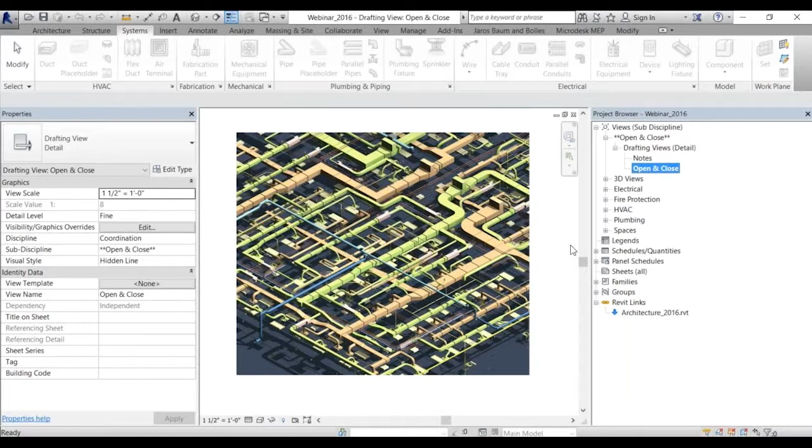In summary, to help our client in their BIM transition, we reviewed their workflows and created and implemented company-wide BIM standards. We also delivered a new BIM Revit template, and helped them in content development, which included smart schedules, one of my favorite things in Revit. Most importantly, we trained their staff to make sure this project is executed systematically to reach our end goal, which is to deliver a walkthrough to the building owners.

Now, before I cover results, I want to go to Revit for a bit and talk more about how we set up projects and what's important when we're talking about a Revit template. If you're a new company trying to set up a project, you probably don't have a lot of content already developed, and you probably don't have a template either. But content is very important when it comes to BIM.

It allows you to be consistent and also allows you to make the next project even better, and the next one, and the next one, which means that you'll win more work and you'll be more and more competitive.

So right here for our webinar today, I have a project open. This is actually the starting view. As you can see, this is our project browser, in a view called open and close. So this is our starting view.

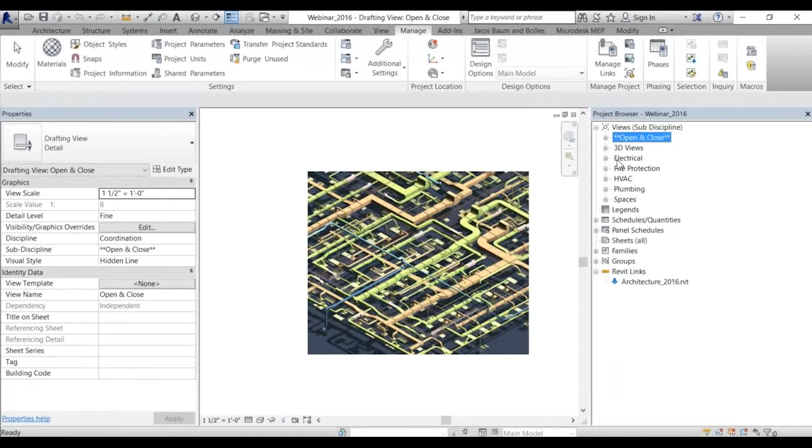Simply because we're here, let me give you a perspective. A starting view can really include anything that you want. You probably have your own format, your company's firm name, the architect's name, the structural team involved, the MEP team involved, maybe even the Revit version or the subdiscipline.

So this can really be anything - I can't say much about this project because it's one we developed for a client - but in order for you to add more information or change this view, if you don't want it to be open and closed, you can always go to the Manage tab and under Starting View, change it.

Okay, so when we set up a project or set up a new Revit template, we first think about organization and visibility. Everything has to be organized in a specific manner, for us to be consistent as a team, for you and I to be working on the same project and know exactly where to go.

So in this particular case, your project browser would host all your elements, your views, your schedules, your sheets, your content, your links, everything is here. To reorganize it, like in my case right here, you can see that I have several disciplines. In this particular project, my approach was, since this project is small, why not include all those disciplines in one file? So you can see we have HVAC, plumbing, fire protection, electrical, all in one file.

This particular organization can be seen by going to the project browser organization, and we can tell that it was organized by subdiscipline. Now, some of you might ask, why do I have 3D views and open and close and spaces here? It's just a way of organizing this.

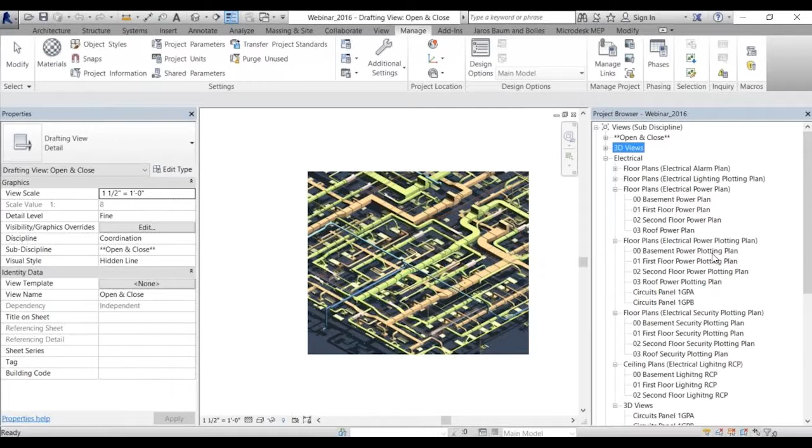It's not the best way, but you can see spaces were created in those particular views. These are the 3D views that were exported, or the isometric views that we had for different disciplines and levels. So this is just a way of organizing it. It doesn't have to be the best way, but that's what we currently have in here.

When we also talk about organization, we should think about the views themselves, so where you're modeling.

If you have a small project, you might be working in a certain view and putting a completely different view on the sheet. For example, right here, this basement power plotting plan is the one that will end up on the sheet, whereas the basement power plan without plotting in it is the one that you'll be working in.

So here we can see that we have a specific naming convention, and that's another thing that we look at when we're setting up projects or creating Revit templates. In this case, we have the level ID and then some description of the view itself, and then if it's plotting, plan, or RCP.

Now, to look at this a little deeper, imagine if you had 50 floors and you want to set up visibility settings for all those 50 floors. You're not going to do them one by one. So that's where we talk about view templates.

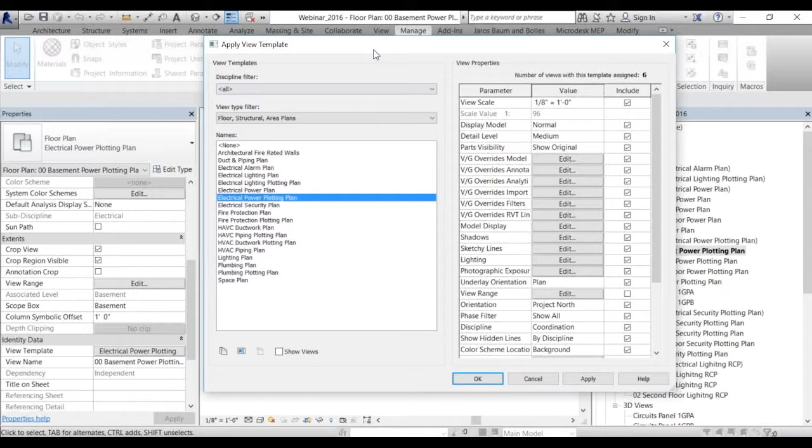In this particular view, since it's a plotting view, you have 3 people working on this project in electrical, and 2 of them are on vacation, and the third one barely knows how to use Revit. He should be able to open Revit and print this sheet. That's why for the plotting views, it's good to have a locked view template that doesn't allow users to modify.

You can, of course, unlock it, but that has specific settings that should be typically displayed on a sheet for power. So if we go to the Properties palette, you can tell here under View Template, there's an electrical power plotting plan view template that was applied for this particular view. And here you can tell that everything was checked except for view range.

And this is really a user preference and a BIM department preference. Like, you can do this in several ways. Some people have view range as a separate view template to apply it to a bunch of views. Some of them included within the view template itself. So this is, we can talk about this for a whole day.

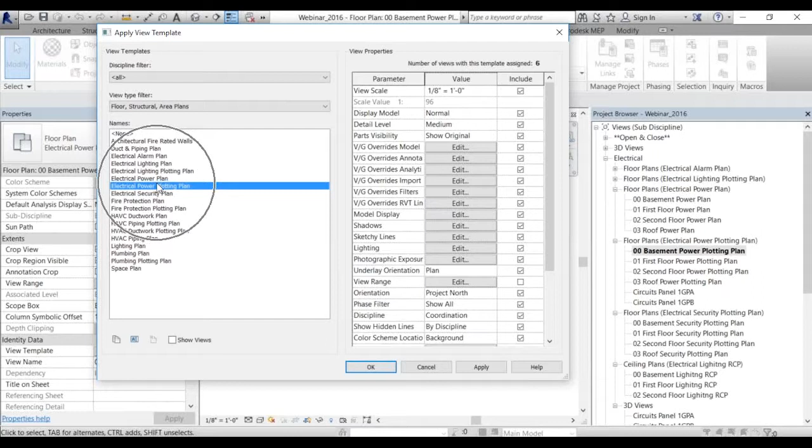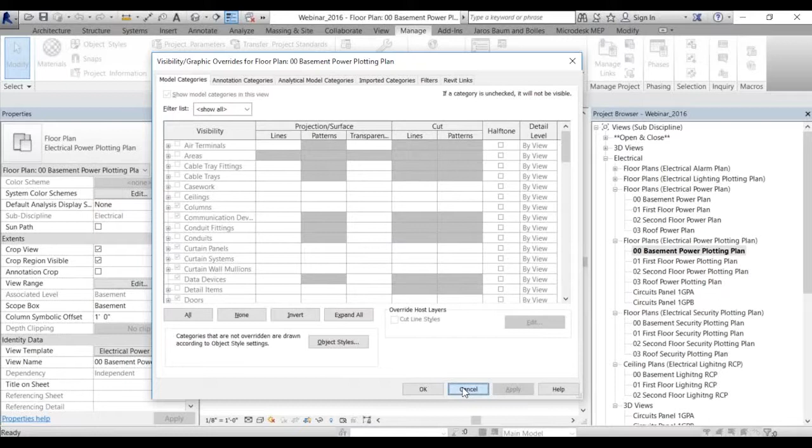But the importance of creating view templates is now we have 6 views in this particular project that have this view template applied to them. That means that if we were to try to change the visibility settings of this particular view, everything is grayed out. The things that should be on are on, the things that shouldn't are definitely off.

Why is this good? Because now, if I need to print this, I don't want to have to worry about, oh, did I turn something off by accident? Did I turn something on by accident? No. Whereas in your working view, that same basement here, you can go, turn things off and on, do whatever you want, do your design here, and then finish by detailing and adding tags in your plotting plan.

So we talked more about organization. We talked a little bit about visibility settings. What other elements are important for your Revit template setup or project setup?

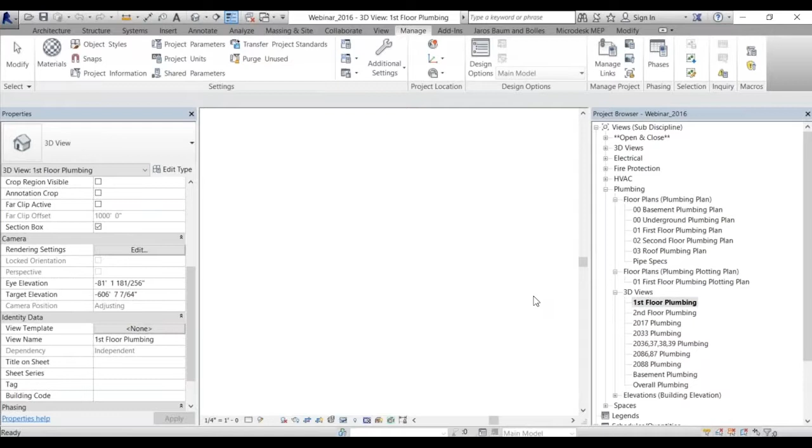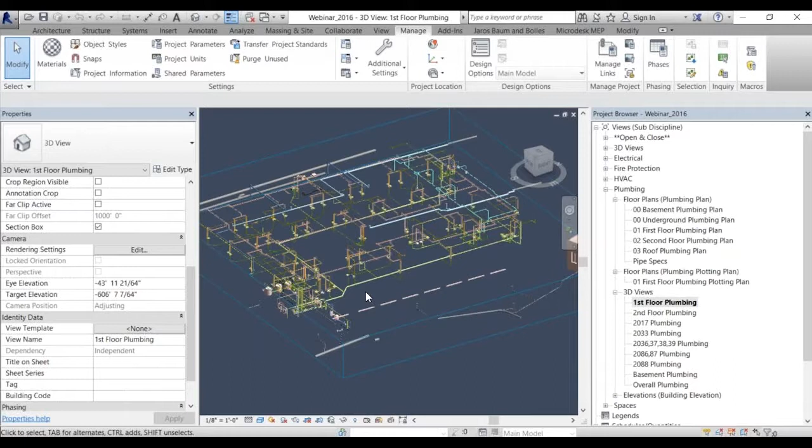One thing that's really important for plumbing and HVAC is your pipe types. I know this might be somehow of an annoying topic for some of you, like, oh, pipe types, different routing preferences, different materials. But why is it important? Because we just said that BIM helps us in reducing cost and in having a more accurate design, meaning less clashes, meaning when they reach construction, they don't have to worry about your fitting not being valid, make a generic one. So in this case, as you can see, those are sanitary pipes.

And for this particular pipe, I can see that it's following what we call a pipe type right here. And this pipe type is the P sanitary hub and spigot. Each one of those pipe types that are listed here have different routing preferences. That's something that we should definitely look at when we're creating our templates and setting up our projects, because we want to look at our company spec and we want to see for this particular system which junctions to use, which elbow to use, which pipe segment material to use for what sizes, what if we're including a cap or not.

So these pipe types, they don't have to be there for your very first project, but this is something to keep in mind, is that the more you work in Revit, the more you're implementing BIM, the more accurate you want to be, the more reliable your model should be. Same thing for piping systems. So this pipe can belong to a particular piping system that can be called plumbing.

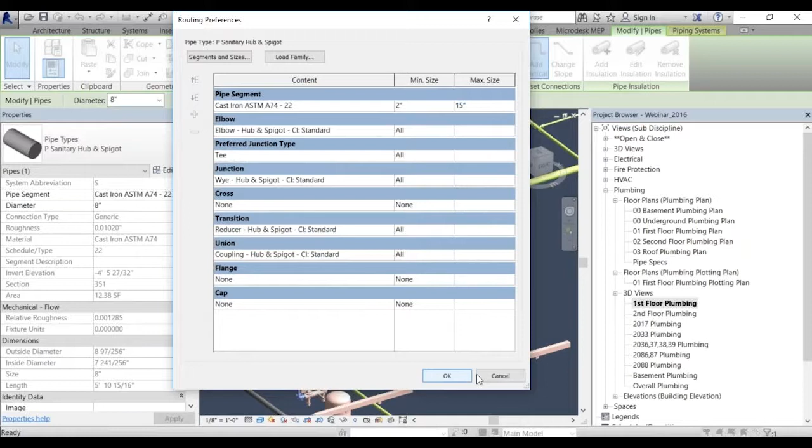When we also talk about setting up projects, we talk about schedules. Now, a lot of you might be using Revit but only as a documentation tool, which is very disappointing. I see this with a lot of clients, and I'm hoping those attending this webinar will implement Revit to its fullest.

Sometimes we decide to tag things by putting text on top of the pipe or duct. So when we change that duct size or pipe size, we lose that tag altogether because it became a 6-inch pipe, but the tag still says 5, and they're not linked together. We're losing that smooth transition of making changes and having them displayed instantaneously, and that parametric functionality of Revit.

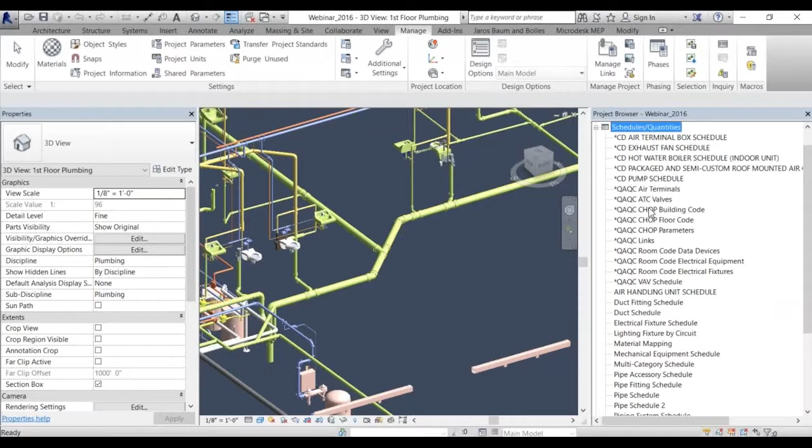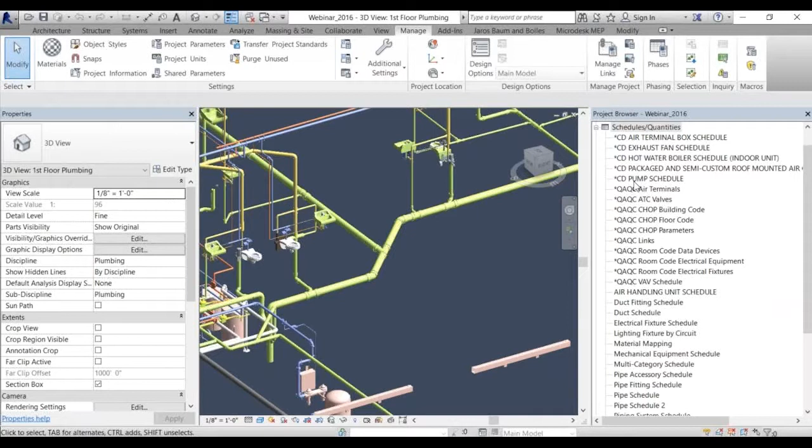That's why I'm an advocate for schedules, because that means you're putting the right information for that particular element, for that particular pipe. So we have a bunch of schedules here, but one example is the pump schedule. It's showing us that we have 3 different pumps in this project, and this pump has several parameters driving it. Since it's parametric, I can just go to that particular pump and see where it is. You don't really have to bother with all those parameters, because once you create those schedules for the first time, they're there forever and you can use them on any project, and go there and change the service or any other parameter.

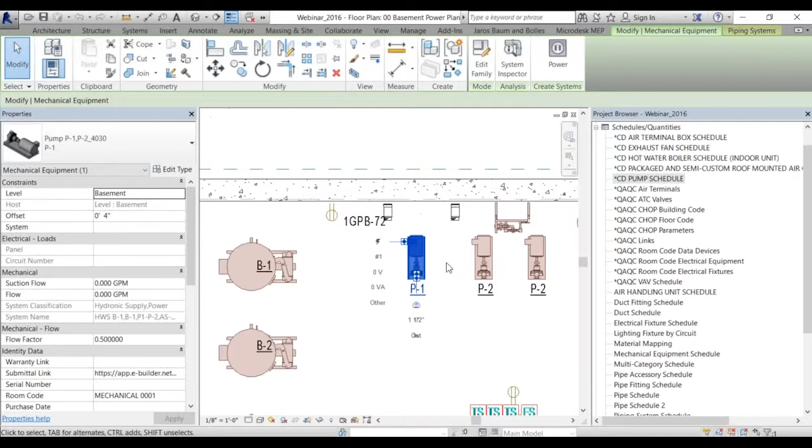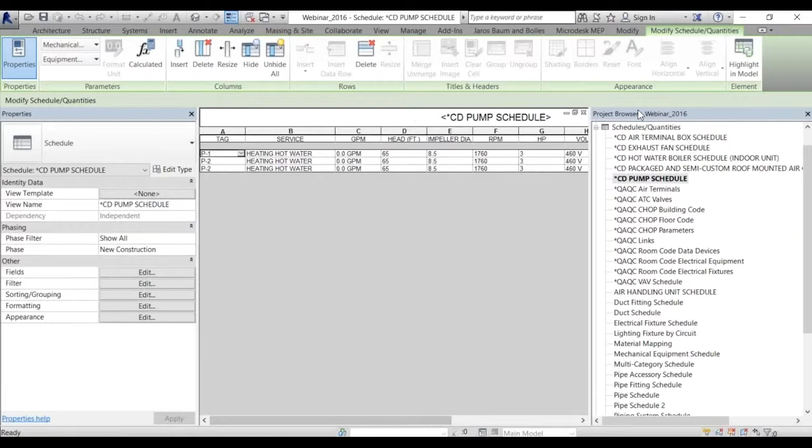So I really hope that after today's webinar, when you are creating Revit elements, you don't use dummy elements. You start with something, even if it's very simple. Like if you're modeling a family and you don't want it as detailed as the one we have here, even if you just start with a box and keep adding more and more details to it, that's a very good start.

Let us go back to our presentation.

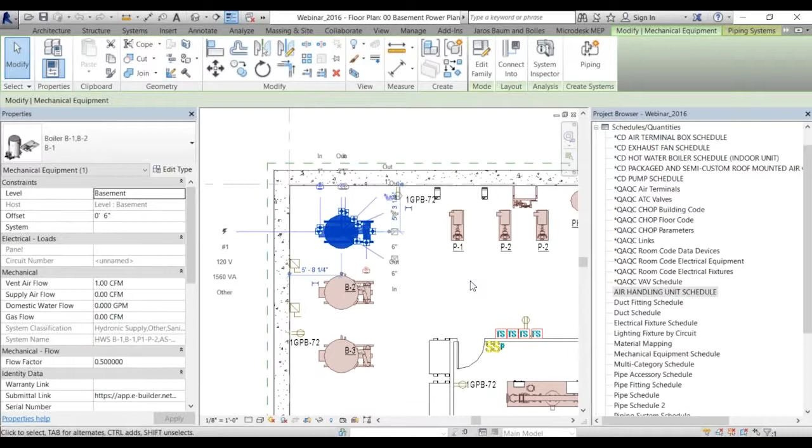So what are some of the results we were able to see with our client after we helped them in their BIM adoption? It's true that we were able to help them out in every stage of the project and deliver a final product, but the benefits are simply much more than that. Our client was able to create accurate BIM models suitable not just to present to owners, but also for owners to utilize for facilities management, which was a very important goal they had initially.

Another effect is improved design quality, and once you improve that quality on a project, you're really doing the same thing on the next job as well. Additionally, as company-wide processes and workflows began to be used, the client was able to see improvements in the design process, overall efficiency, and also new skills were added.

Team members were more excited, happy to be using new technology. Now they have additional skills. The client also became more competitive and was presented with new opportunities.

In summary, on a project level, when you implement BIM, you help reduce risk and waste. You improve your design quality. You reduce errors. You improve communication on a team level and also with other parties working with you. You improve project delivery as well.